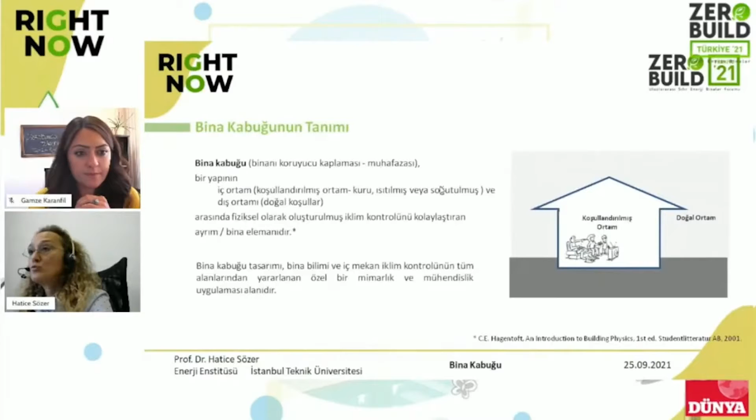When we say building envelope, we actually talk about the covering, coating, and protection of the building, and it separates the indoor from the outdoor. For example, it protects against external conditions like rain, snow, and wind, while there is the conditioned environment inside.

According to this, the dried, heated, and cooled environment is separated from the external environment, and it shows the separator, which makes it easier for climate control. The design of the building envelope is not only made by architects, but it's not only related to engineers either. Both architects and engineers can work together.

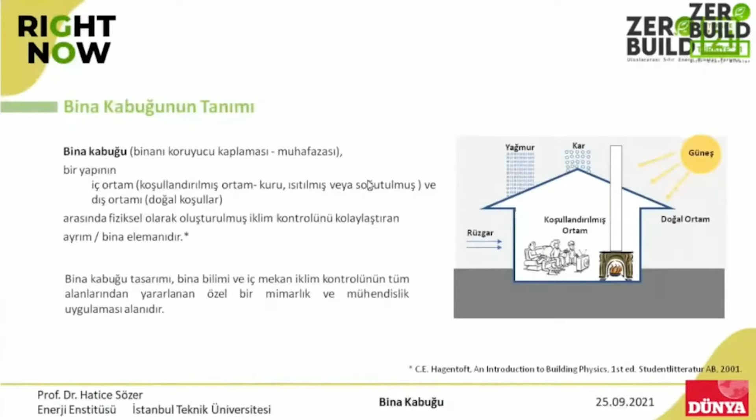So the category can be divided in three ways. When we look at the functions of the building envelope, there are many functions, and we can divide them into three categories. The most important one of them is support, for ensuring support to be resilient to dynamic internal and external forces, and also to transfer this.

At the same time, it provides control. The control is against external and internal loads, and it also regulates the performance of the building. When we say performance, I'll talk about energy preservation, heat performance, air tightness, and also the impermeability of air, ensuring fresh air, and also fire safety and acoustic performance being better.

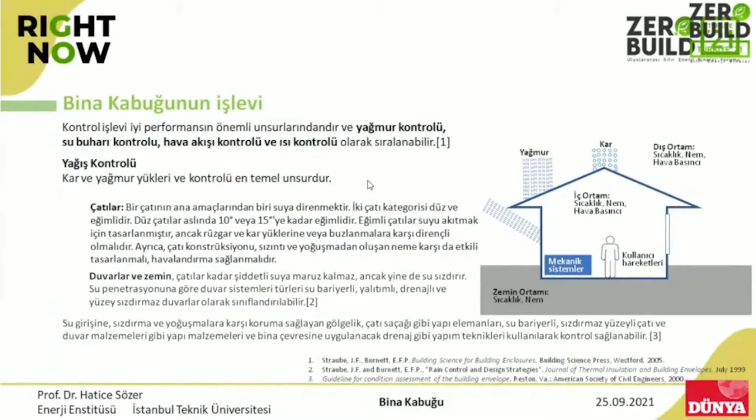While we select the building envelope against these natural effects, the building envelope should be selected accordingly. Insulator, barrier, drainage and surface tightness walls should be used.

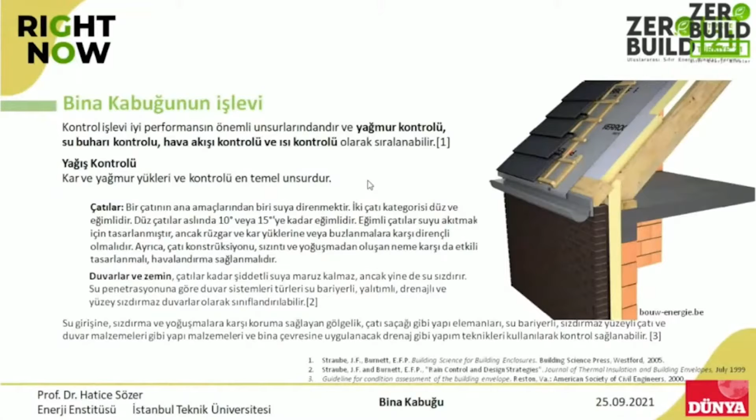Water insulation, as you can see, can be applied here. This is not only the insulation material; it is also about the drainages. It is very important to have the fringes or overhangs and cornices with soffits, and there are strategies to prevent the rain from touching the surface.

in order not to have the rain inside. At the same time, controlling the precipitation, we have to have the sun under control. The sun control can be done with energy control. There are two criteria. The first one is the daylight.

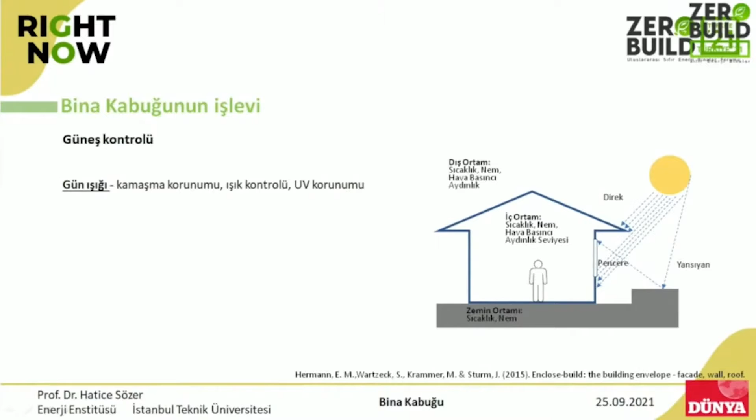It is to have the glares and protection from the glares, and also the illumination control and UV protection. We see that these windows are the ones which are used for controlling the sunlight, and the flow of heat is also important.

There are two types of these: there is a diffused beaming and also conduction, and the heat reaching the building. With the building envelope design, it can be taken under control.

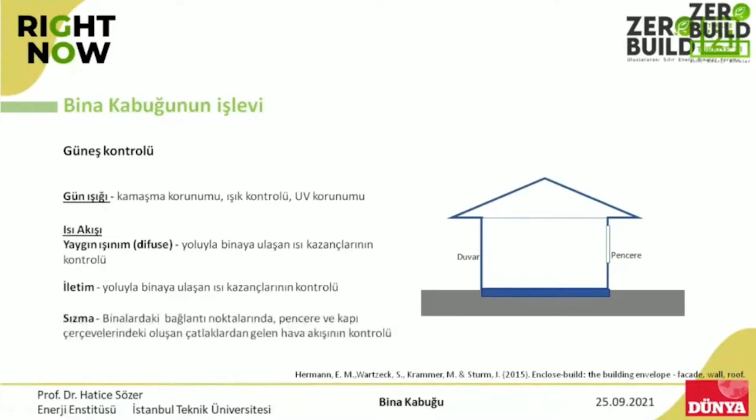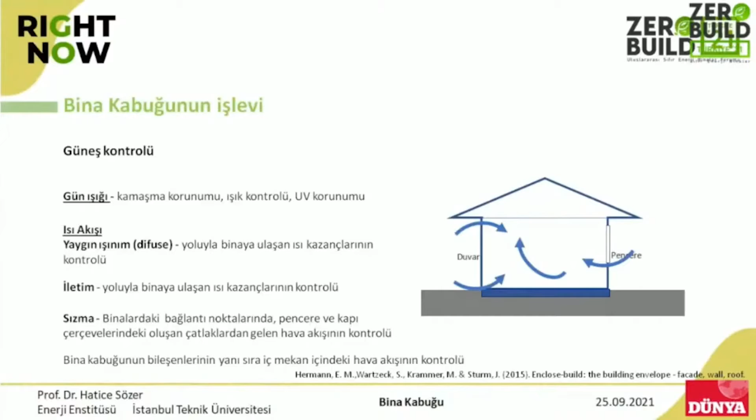At the same time, the elements of a building envelope, the different building envelope elements, there shouldn't be any leakages. There could be leakages because of the walls, and there could be heat gains, and also, because of the heated air going upwards, there could be a flow of heat. All should be in a controlled manner.

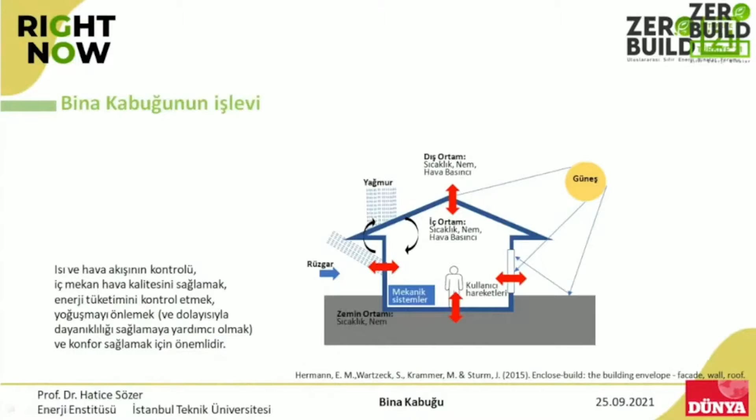The controlling of the building envelope this way has certain effects on the energy performance, and at the same time, for example, there should be purification of moisture and humidity, prevention of water leakages, and a durable and resilient building envelope—all of these are effective.

As I told you, the elements of the building envelope, if we are to list the physical components, we see the external walls, the doors and windows, the roof systems, the undersurface coating, and also the foundation, which separates the internal and external environment.

These are called the building envelope elements, and at the same time, chimneys can be used and taken as elements of the building envelope. Of course, the assemblies of these parts can also be taken as elements.

When we say the elements, the wall material—there might be more than one wall material, and based on the functions, the materials can be different as well. The carrying element material, or the wall materials, could be different from each other.

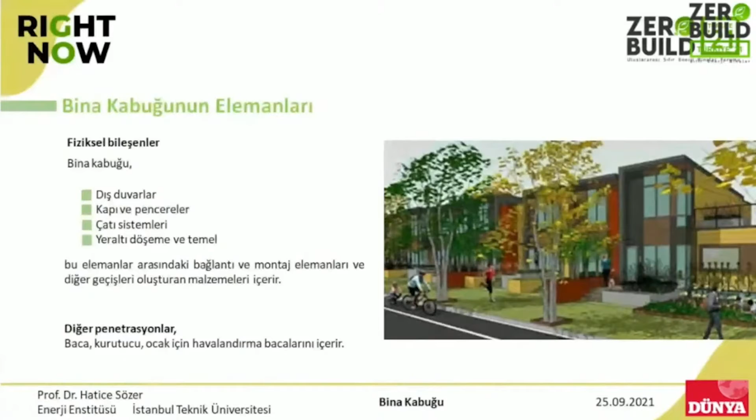Therefore, all of these and their functions are important in terms of the building envelope. Their interactions in terms of building envelope and heat gain can be different.

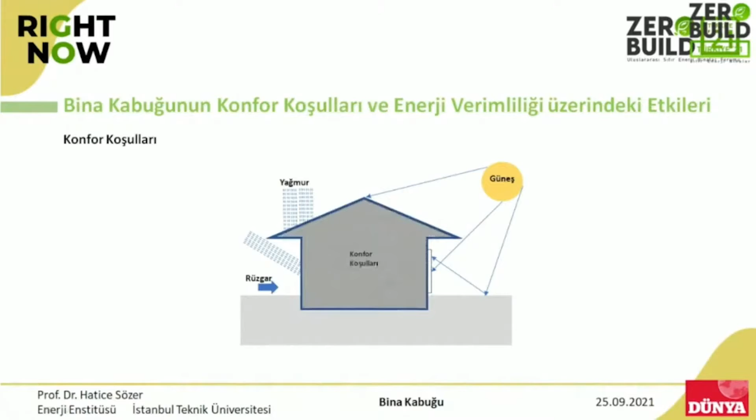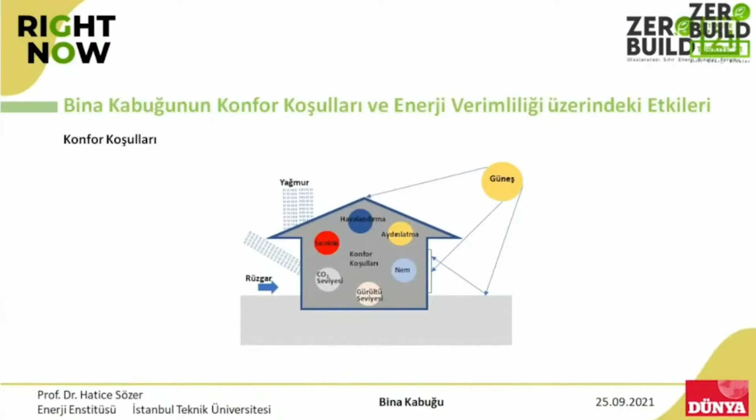When we look at comfort conditions, it's about what we feel as comfortable. Although there are of course the conditions that we create inside through making use of the conditions outside, there could be a certain humidity, noise, ventilation, carbon dioxide, illumination and heat levels involved. This is how we ensure comfort conditions indoors.

So therefore, with the comfort conditions, when we look at the effect of this, we see that there are heat comfort conditions. When we look at their effect on the design conditions, we see that first we need to look at the heat comfort conditions. So what are those?

These are the factors: metabolism speed, clothing insulation, ambient temperature, radiant temperature, air speed, and also relative humidity.

Of course, the reason why there are these changes is about metabolic changes. With youngsters and elderly people, the temperature heat that they feel are different.

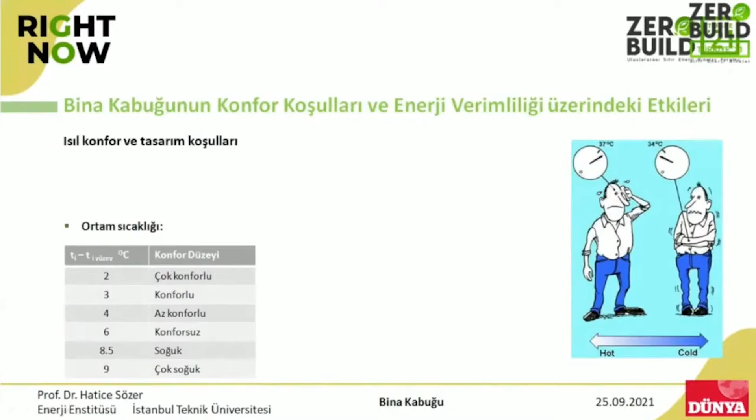Therefore, the objectives show that if there is this difference, we feel uncomfortable, and this affects our situation as well. It also affects our productivity. The fact that it is very high or very low is affected.

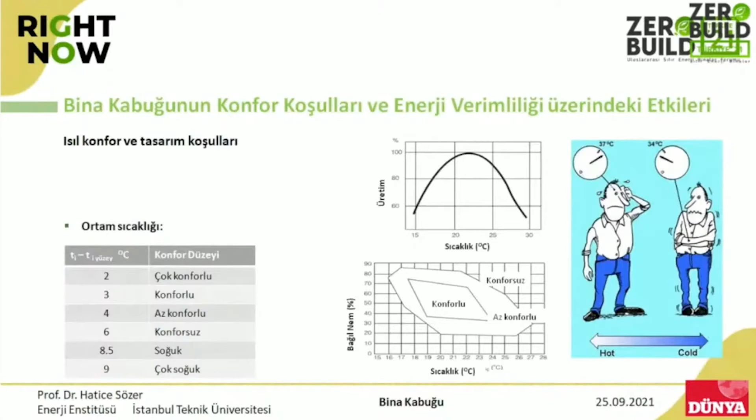And when we look at the comfort conditions, the relative humidity also has an effect on the feeling of comfort. So the temperature and also humidity affect our productivity, and have a positive or negative effect on the productivity of ourselves.

When we say there is a heat or temperature difference, and we feel that there's a difference, there could be some negative impacts. For example, the temperature of the head and the temperature of the foot being different.

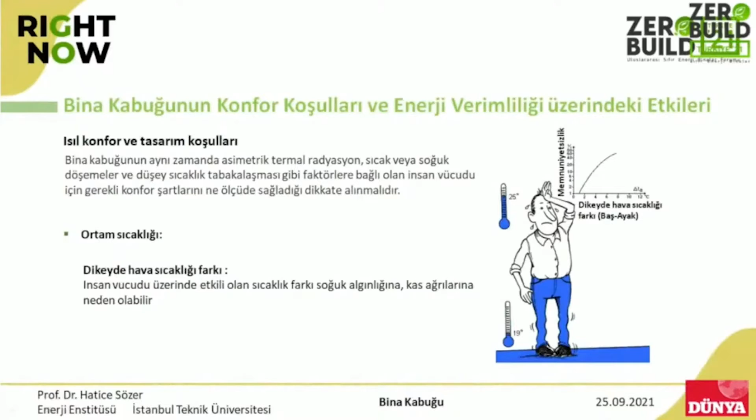In order to get rid of these, the temperature should be homogeneous, and we have to be careful of this.

Accordingly, if the floor is very cold, for example in bathrooms, when we just go out of the shower, we see that the floor is cold. It makes us feel uncomfortable. It's about the material, about selection of the material when we design this.

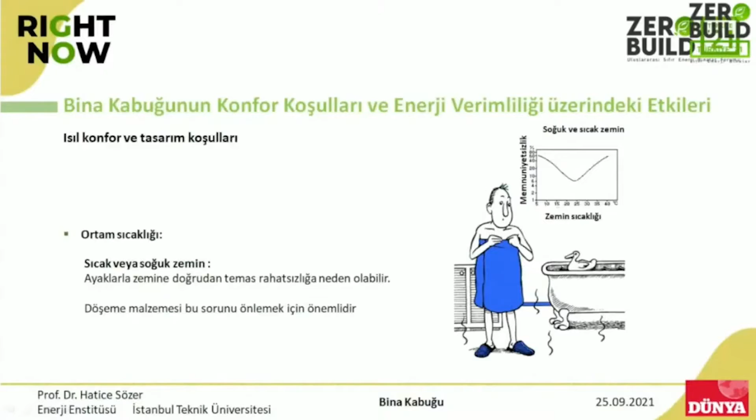And there could be such differences, and we have to look at how we can eliminate this through material selection according to our comfort level. Of course, airflow is important as an important factor, as there is air movement.

Regarding that, there is partial cooling of this, and we all experience this, and this causes flu-like symptoms and muscle pains.

So in the ventilation, as we want to make use of these, what are the levels of this is important.

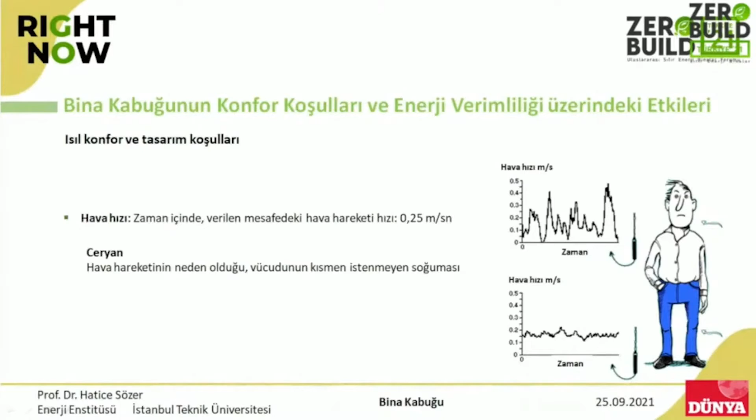If you are to make a summary of this, while designing the building envelope, it is about how you take the air inside, and of course from the walls.

The air quality systems are important, and the heating can be from one certain part of the air, and this causes an uncomfortable feeling.

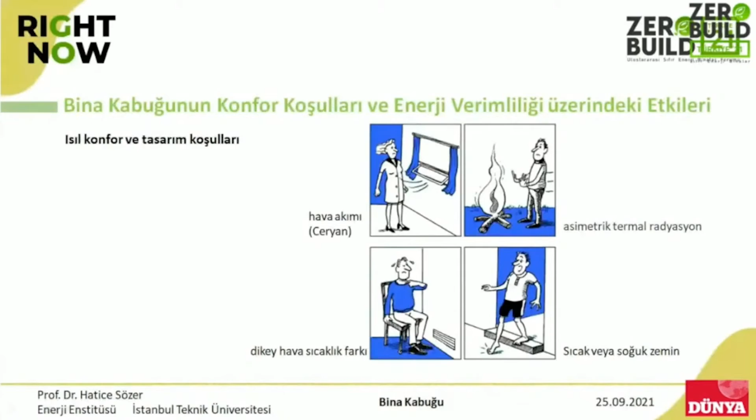With these systems, there could be non-homogeneous systems, and these are all important, and this could cause an uncomfortable feeling.

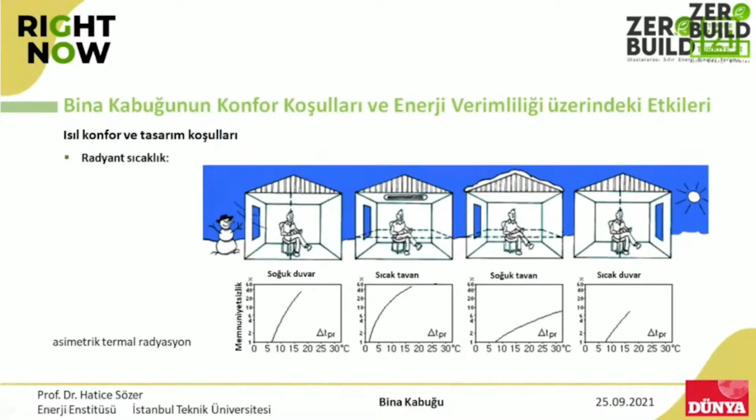Based on the research that is conducted, if there is a temperature difference coming from the surfaces to the ceilings, whether it is hot or cold, and our bodies perceiving this, if it is more than 5 centigrades, then it makes us feel uncomfortable, as can be said.

And when we look at the building conditions, when we look at the energy performance effects, what we have to pay attention to is the envelope of the building. While designing this envelope, it's about how we will position our building, and this positioning can be geographic, and also about the direction, the orientation of the building.

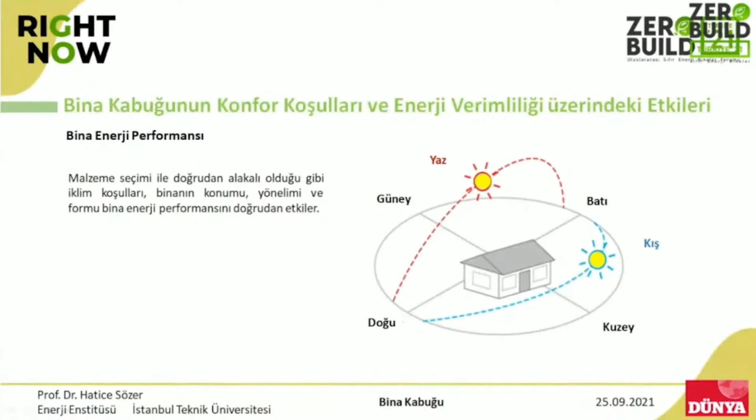So it is about how we benefit from the sun and from the wind. It's about the positioning and management of the building, and this is one of the most important criteria that affect the energy efficiency of the building.

When we look at the different climate zones, we see differences in the building envelope. For example, when climate conditions become too extreme, the building envelope has no open gaps between materials.

When the climate conditions are more tolerable, the building envelope is more permeable and designed for better use of external conditions. In dry and hot climates, the building envelope differs from that of more tolerable climate conditions, in terms of the material used, and we also see different gaps in between.

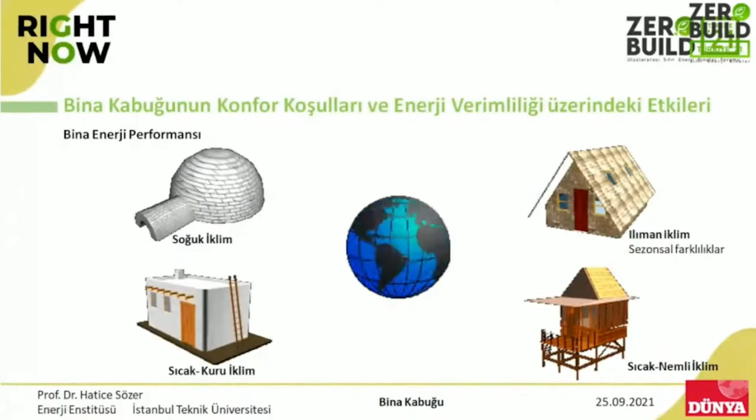So the thermal mass is higher, meaning it has more heat capacity. These are the materials that are used, and we can easily observe that the building envelope and climate conditions are directly connected to each other.

There might be different climates with the same building characteristics and features. We see that the buildings in Switzerland are similar to the buildings in the Black Sea region because of the heavy rain and because of how they perform there.

The facade materials are resistant and strong enough to resist this rain, especially in cold climate areas. In order to benefit from soil heat, in some cases houses are built under soil. We have some cases in the province of Kars in Turkey.

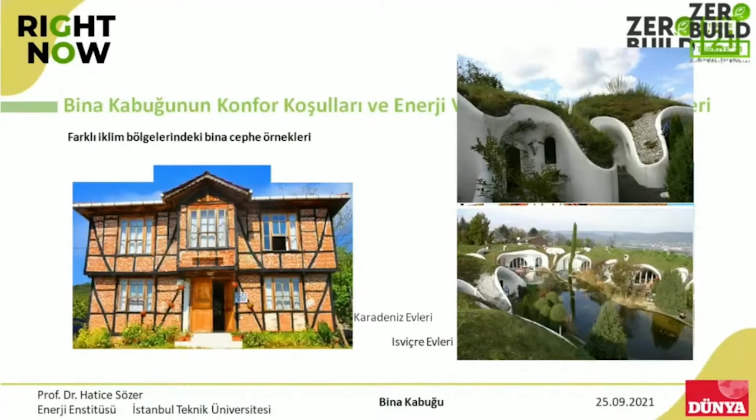That means there are similar characteristics depending on the climate conditions. In New Orleans, these building envelopes are similar to the building envelopes in Muğla province.

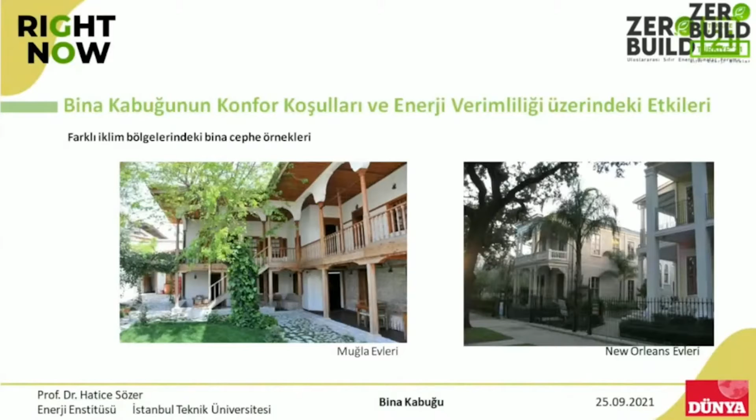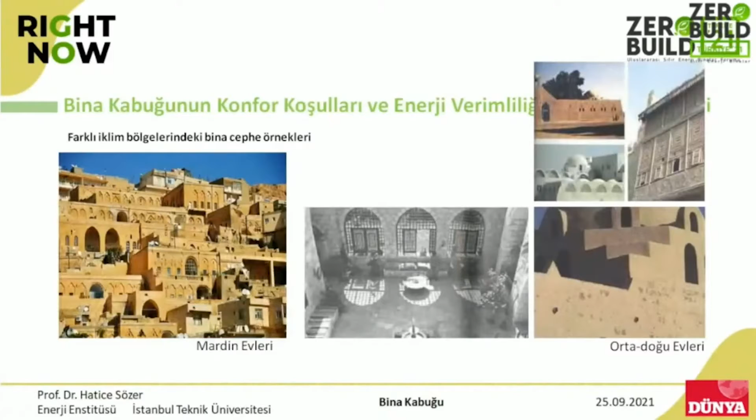Because of similar climate conditions, we have balconies and terraces in these two buildings, and also atriums and trees for shadowing purposes. Houses in the Middle East and in the city of Mardin are quite similar because of the hot weather conditions and temperature. We see similarities, and there are also elements to create shadow.

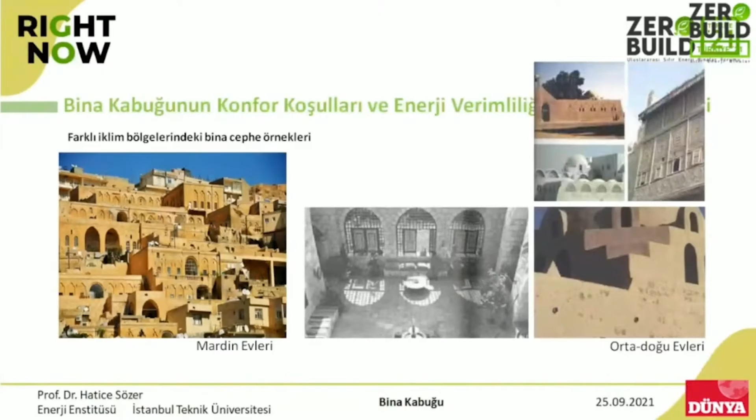As regards energy efficiency, we are talking about this issue. The material is important, how we calculate heat, and the material's conductance is important for us.

Conductivity is very important for us, and the thermal conductivity of these materials is very important as a criterion, as I just mentioned. In addition, we should pay attention to the type of material, the area these materials cover, and the difference between exterior and interior heat. These are the criteria we use in our calculation.

Of course, all materials have this energy performance certificate, and we use this. I don't want to go into details, but we use the U value when we talk about heat performance, and we will see this performance. This U value is the most common one, and we always see it whenever we talk about heat performance.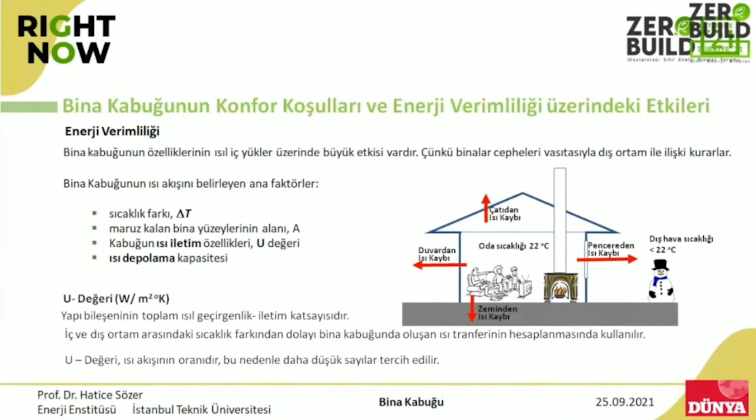This is why we need to prevent heat loss. For example, if there is 22 degrees Celsius within the house, and if it is colder than 22 outside, the heat will move to the outside. This is why we need to design the building envelope in line with this principle.

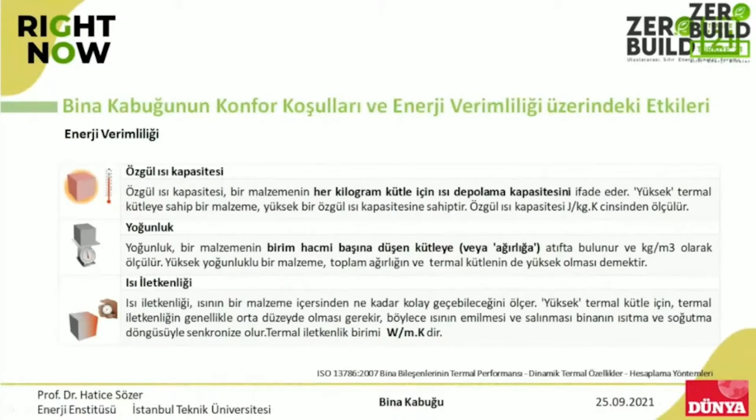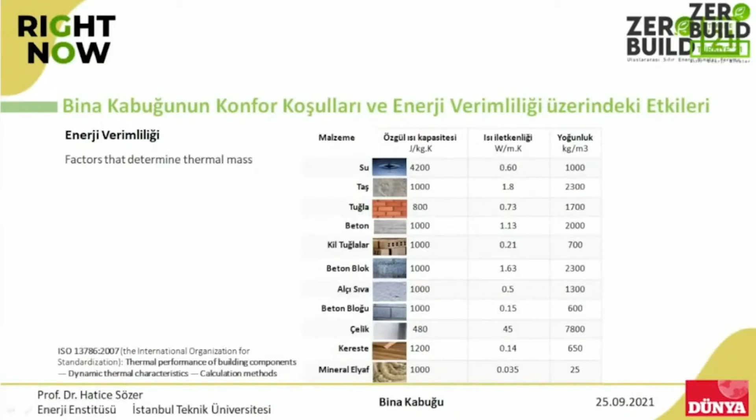As I said, while we are selecting, we need to look at this specific heat, and its specific heat capacity, its density, and also heat conductivity. Of course, each material has different values, and we need to make our decision based on the quality and also the features of these materials.

As I said, we need to calculate the summer period and the winter period differently. But while we are selecting materials, we have no chance to change these envelopes during the winter or during the summer. That means we need to select the most suitable one, so we need to have materials which have high capacity of maintaining heat in them.

And if we have this material, for example, for the winter, then this material will store heat, like natural stone or other materials that have high capacity. It will store heat from the sun, and when the sun sets, the material will still use it.

So these materials are important for heating purposes, and we can use these materials for heating purposes. It can especially work well if there is a high difference between the daytime and nighttime temperatures, such materials might be used very effectively. And also we have these summer conditions and we can still benefit from this.

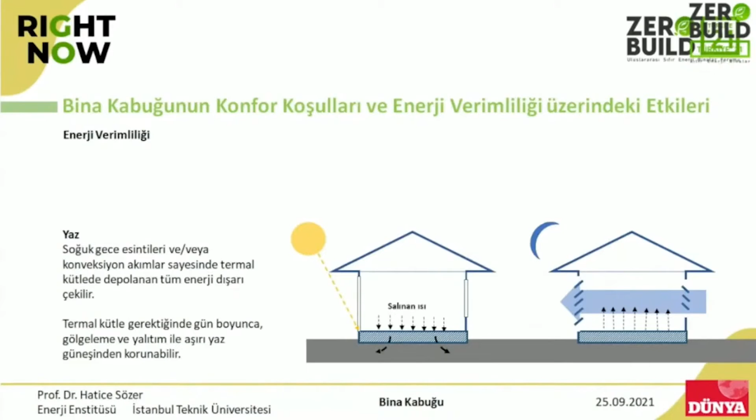And on the contrary, we can have some elements to create shade for shading purposes. So we can direct the heat of the house into the ground, and then we can use it when there is no sun, when the sun sets. We can have this natural ventilation to transfer this heat to the outer walls of the building.

And of course, while we are designing such buildings, we also need to look at the equipment within the building, because we need to pay attention to their impact on the heat performance. And also even our body has a certain amount of heat, especially in the summer period. We need to look at the interior design of the building and also the equipment of the building.

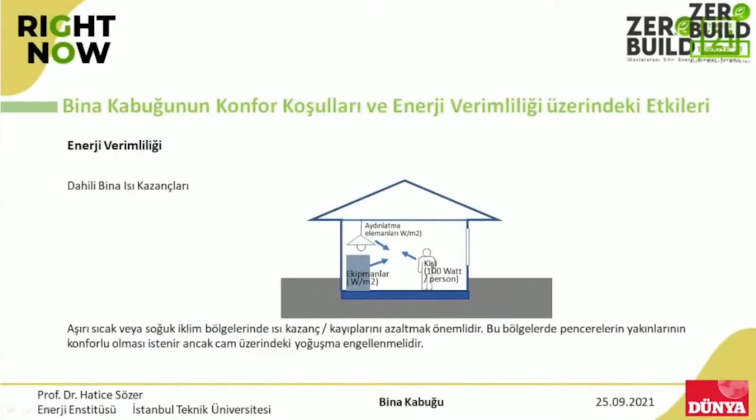And also we can calculate our designs based on the heat gain and the heat loss calculations, especially for existing buildings when they are renovated or when we design new buildings. We need to look at the building envelope and also the insulation materials that we use, because when we look at the coefficient of insulation materials, we see that these are usually low values.

So when we add additional materials, then we improve the condition, then we improve the situation. Another criteria that we need to consider: what will be the thickness of this material? Of course, we will make a decision about the thickness depending on the heat values within the house and outside the house, within the building and outside the building.

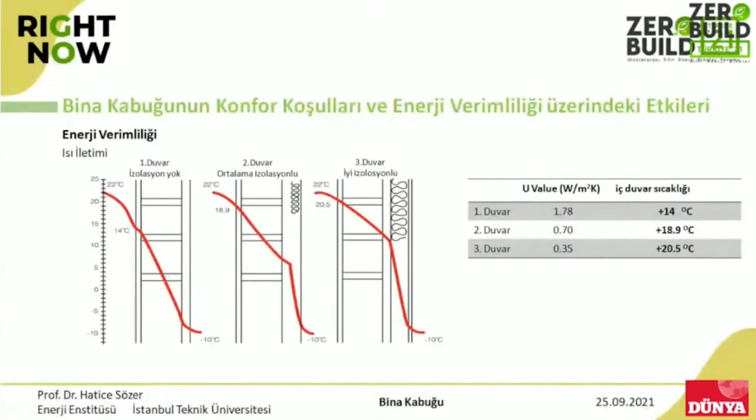Therefore, we need to look at the way the heat enters into the building. Of course, we also pay attention to the insulation process, and insulation materials will be used both in the summer and also in the wintertime, because we cannot remove it in the summer period, for example, or in the winter period. So we need to make our decisions based on all these criteria.

We can discuss if it is towards the inner part or the outer face. So we need to decide the location of the insulation materials, whether it should be on the inner walls or exterior walls. There are many criteria to consider, but the material that we are going to use is important.

When we look at this issue, if it is -5, for example, and if the insulation material is applied to the exterior wall, then it will increase up to 10 Celsius degrees. And if, for example, the outside temperature is 35, and if the insulation material is applied to the interior wall, then it reaches up to 18 Celsius degrees.

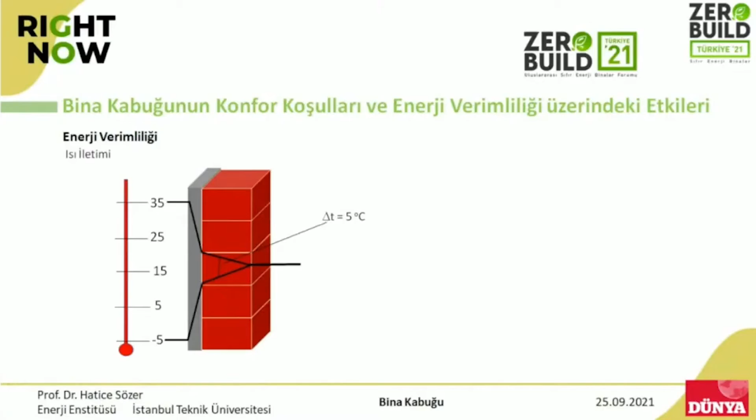So the heat difference that our building wall is subjected to may reach up to 5 Celsius degrees if we apply it to the interior wall. Our exterior wall is subject to the cold or hot weather conditions.

The heat difference that needs to be tolerated reaches up to 30 Celsius degrees, so if we apply insulation to the interior wall, we should consider this fact.

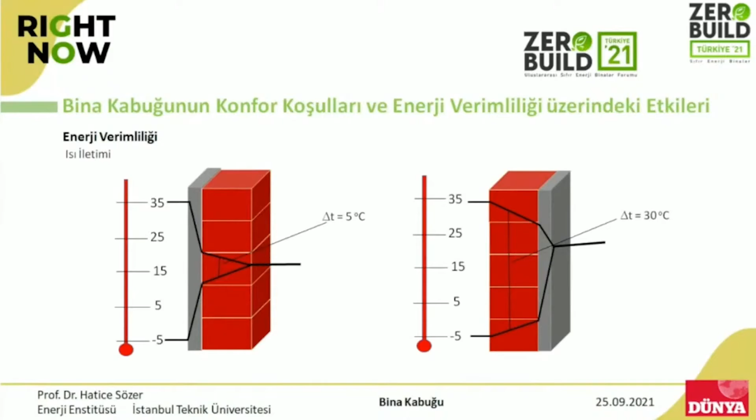Balconies are an element of the building. If insulation material is applied to the exterior wall, we need to apply these insulation materials to the balcony as well, because since the balcony is part of the building, if there is no insulation material, heat will easily enter the building. So we can cover the balcony with the same insulation materials applied to the whole house.

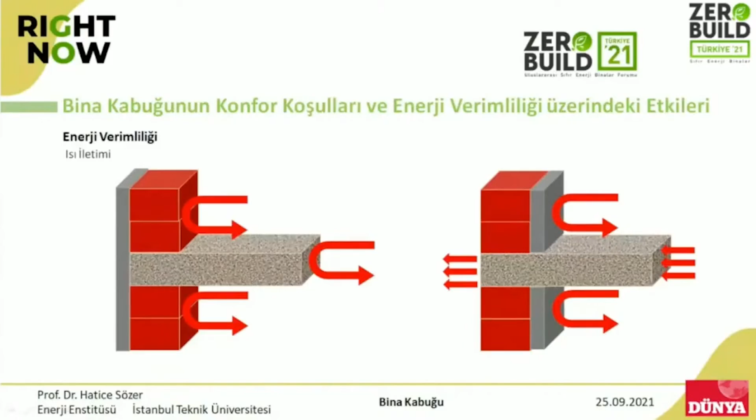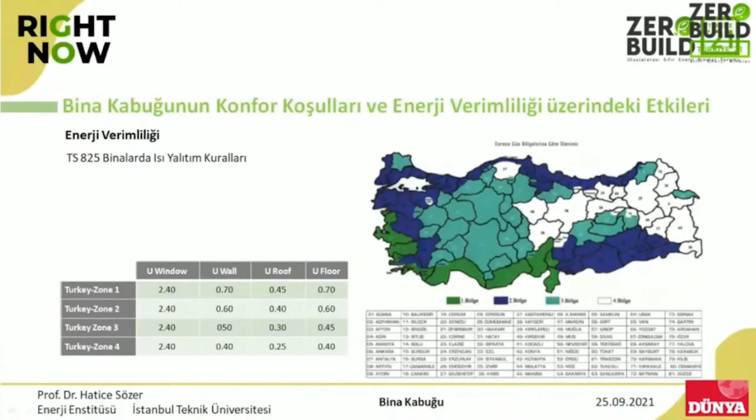While designing the building envelope, the materials and the coefficient of conductivity are set by TS 825, because TS 825 sets the rules for heat insulation for buildings. Turkey is categorized according to climate regions, and the values for windows, walls, roof, and basement are calculated and published by TS 825. That means while we design the building envelope, we need to have some strategies.

We need to pay attention to winter conditions and also summer conditions, for example.

We need to look at the U value, the heat conductivity value, and we can use these types of materials that can prevent heat loss, and we also need to get maximum benefit from sunlight during the winter period.

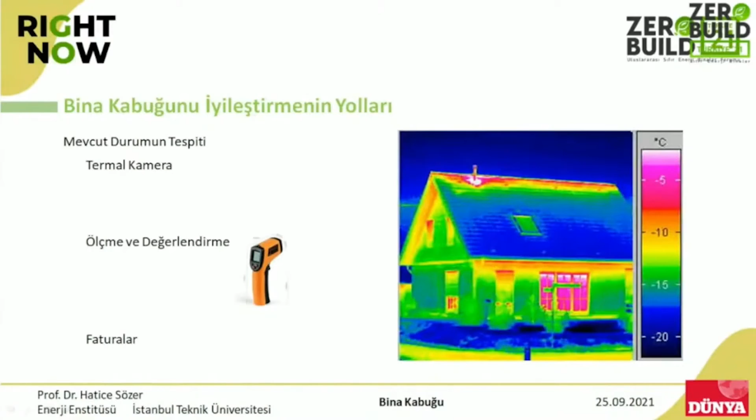If we see that there is extreme heat or extreme hot or cold values, then we will realize that there is a problem with the building.

We also have simulation programs which let us take a picture of the building in a dynamic way, and we can calculate all the required values, so that we can get monthly consumption values of the building.

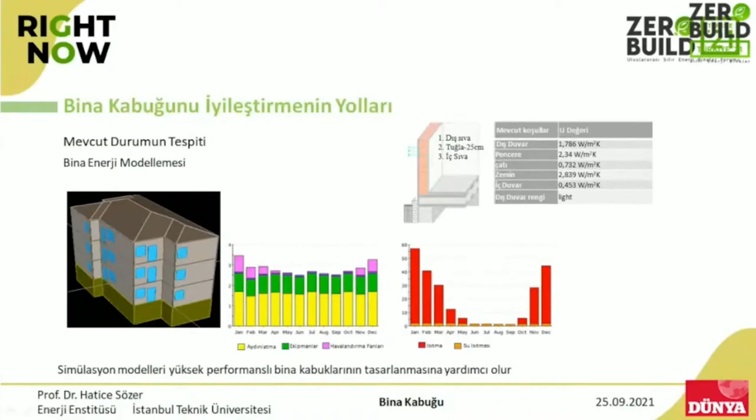We can, for example, find the values for lighting or ventilation, and also thermal recovery for cooling or heating purposes. We can use these types of simulations to develop our strategies.

This is a detailed calculation that we made for an EU project. In this building, the living room, which is close to the exterior facade, had a window that was too small to get enough daylight and natural light. It was also negatively affecting heat consumption, and it was not useful for natural ventilation.

In order to improve the condition regarding natural light and ventilation, it is important to pay attention to this. I don't know whether you can see it or not, but there is an element to provide shadow, and we also had some shelves to reflect the light that comes from outside the building, aiming to reflect this light to the ceiling of the house. That means we need to identify the current situation, and our solutions should be based on our findings.

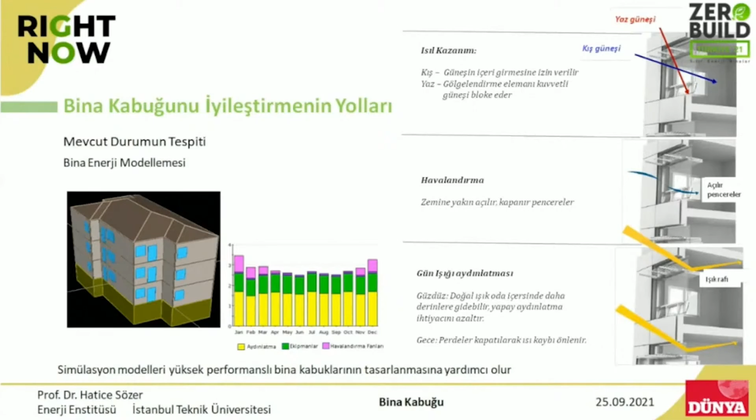As I said before, the building envelope, especially for heat performance and isolation performance, is very important, and we need to be careful about leakage in the locations of the assemblies where different materials are connected to each other.

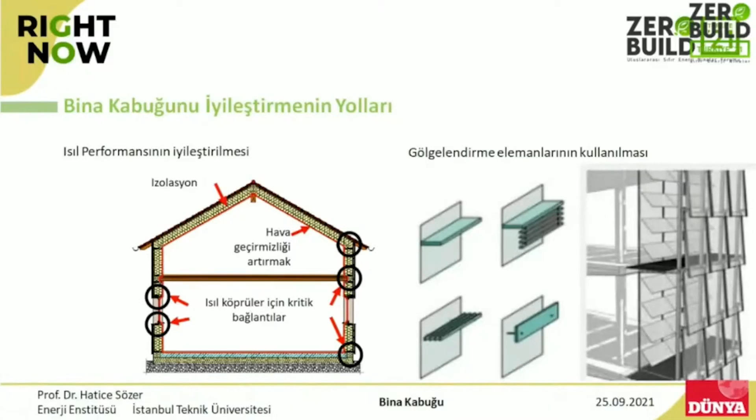Shading elements are important building envelope components to prevent heat gain, and the selection of shading elements is important. We need to know all the details, the sunlight directions, and also the materials, whether we will apply them vertically, horizontally, or alternatively in both vertical and horizontal ways. We will use all these shading elements.

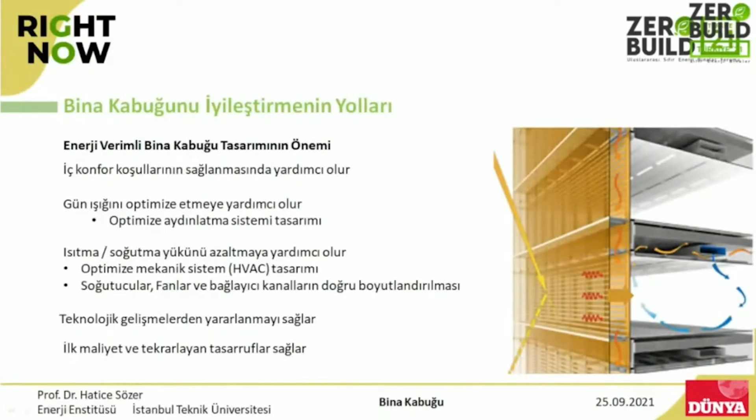We can benefit from different technologies, these automation systems like the shading elements, etc. We can get benefit from all these issues. So we can consider all these issues, and we can also make conditions, and we can make calculations which have important effect on the energy consumption values.

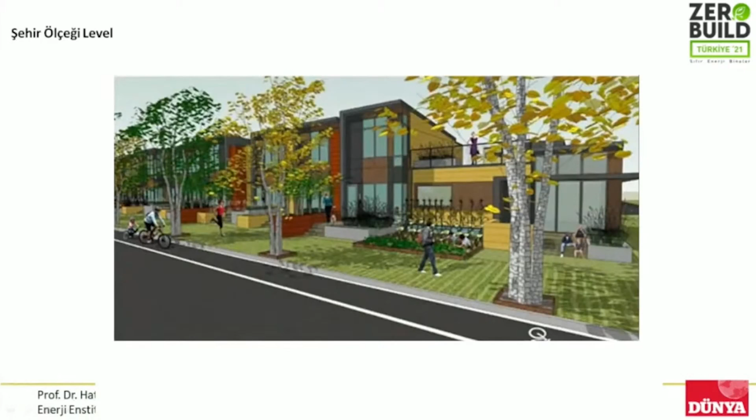My final point is as follows. We should not design the building envelope in a separate way than other elements, because we cannot examine it in an isolated way. We need to pay attention to wind, sun, and also other locations. And we also should be careful about the materials. So it is not only the thermal performance, but in addition to thermal performance, we should be careful about

their relation with nature. While we design a building, we need to look at the building needs and how we can meet these needs. And we can think about how to generate energy, how to meet the need for water. But these are the issues that we get from nature. But when we use them in building, how to send them back to nature and how to get them from nature again. So it is not all about the thermal performance.

And we also need to look at when the building life cycle is over, it should not harm nature. And we should also have information about, or some predictions about, the building waste when the life cycle is over.

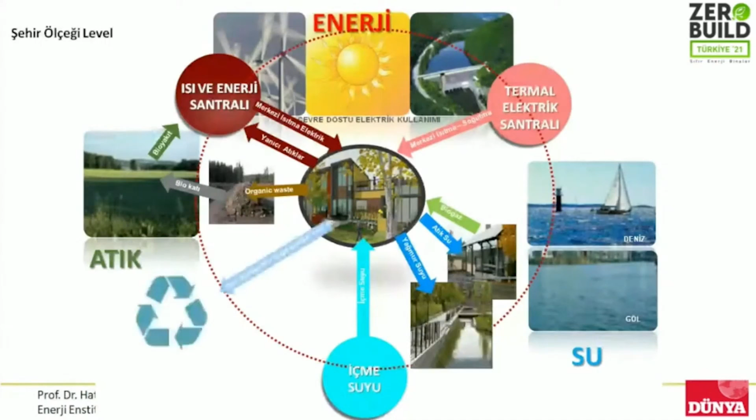So it is not only the building envelope, although we may think that it is only the building envelope, everything is intermingled, everything is dependent on each other. Therefore, the energy performance is affected by the building envelope, and while we calculate this capacity, we need to know the existing situation, the existing values, and the location of the building is important, because the building envelope is directly related to environment, the location of the building, its physical environment.

And if, for example, we have a building which is higher than our building, then there will be no wind, for example, or some buildings may prevent the winds. So the fossil use of energy needs to be reduced, and we should ask how. And all these issues should be examined and should be considered while we design it. Thus, we can have a balanced consumption of energy and also consumption of materials.

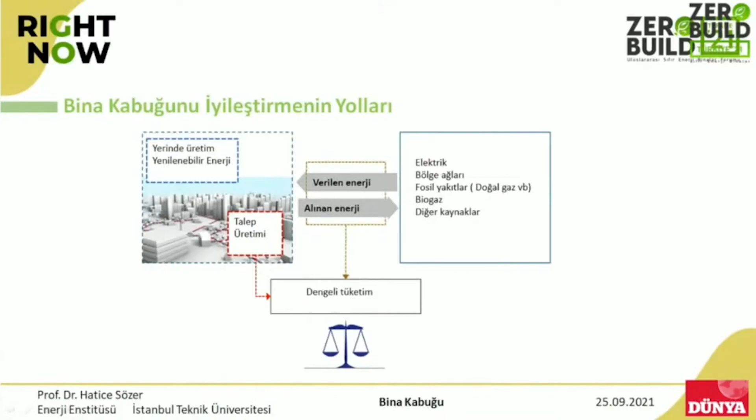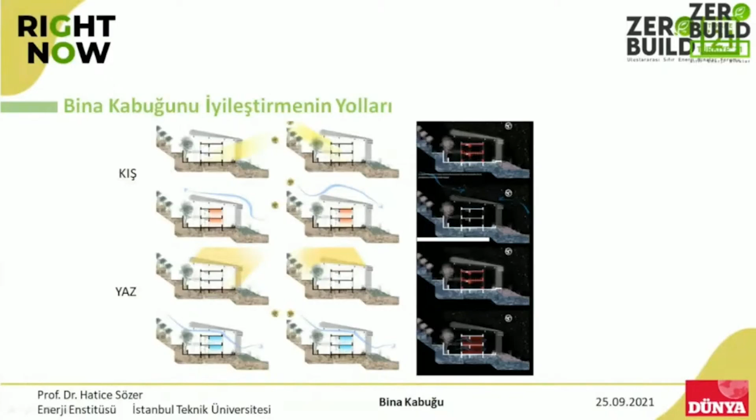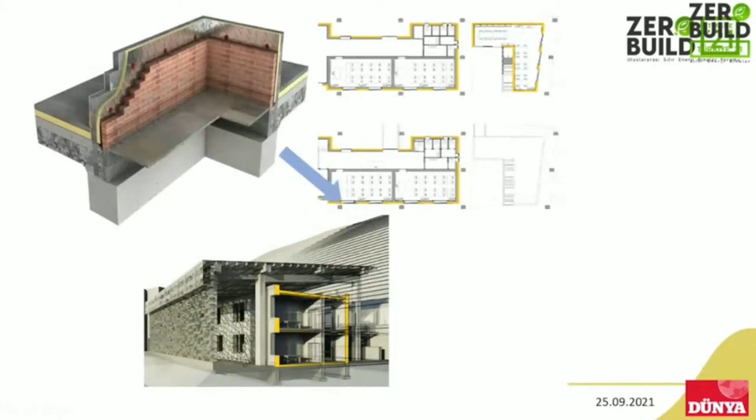After all these, we can calculate the situation, or we can make predictions about the winter and the summer periods. Following this step, we can go into details for this thermal bridge, how to prevent the heat loss, and we will also decide the layers of the building envelope.

Therefore, we need to have a holistic approach in our design, and we need to design at the city level first, and then we need to move to the material level. That is the decision. Thanks for your patience.